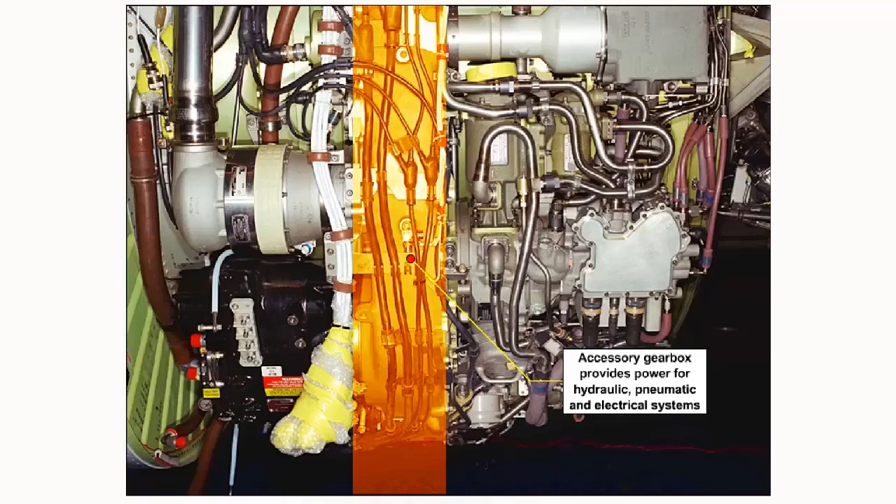The accessory gearbox provides the power for hydraulic, pneumatic, and electrical systems which are used on both the engine and in the aircraft. The accessory gearbox is also used to drive fuel pumps, oil pumps, and tacho generators and various other devices necessary for efficient engine operation.

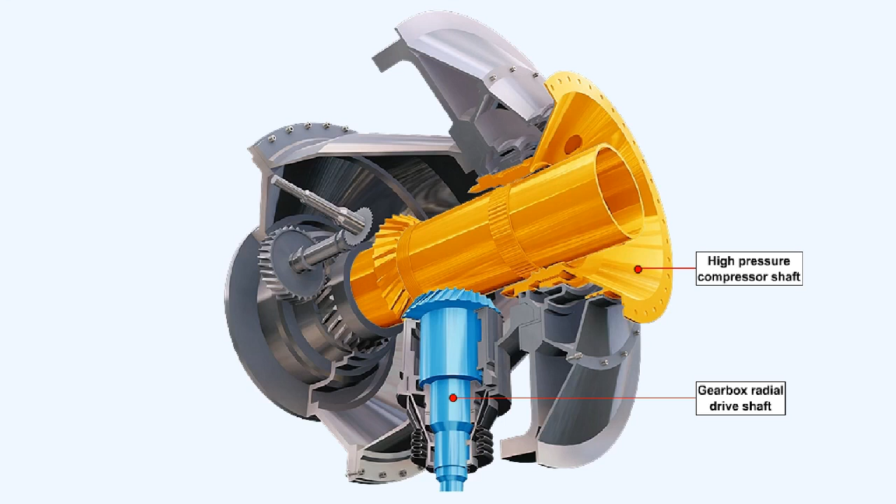The drive for the accessory gearbox is usually taken from the high-pressure compressor shaft via an internal gearbox. The drive then passes to an external gearbox, which provides mountings for the accessories and also, in the majority of cases, the engine starter motor.

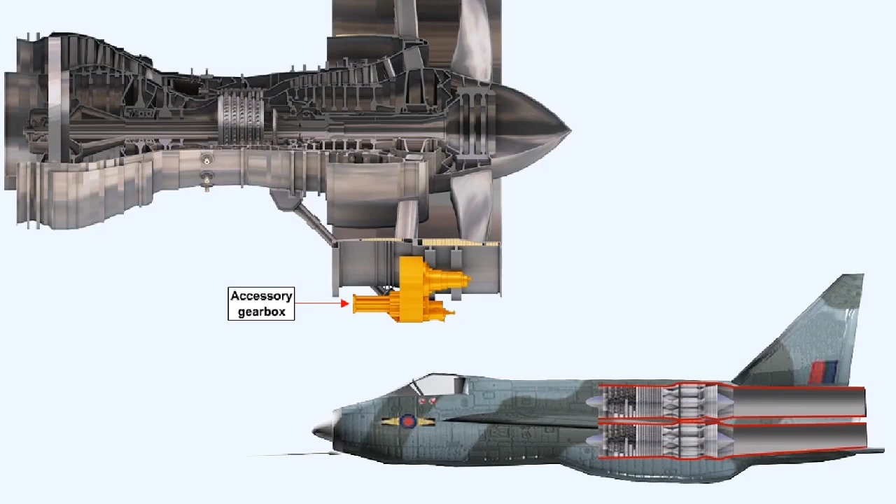In a modern turbofan engine, there is much less of a problem regarding where to fit the accessory gearbox than there would be in the case of the sleek, slimline type of engine which might be fitted in a fighter aircraft. The turbofan engine itself is so massive that even the largest accessories can be fitted beneath the cowling that forms the air intake fairing.

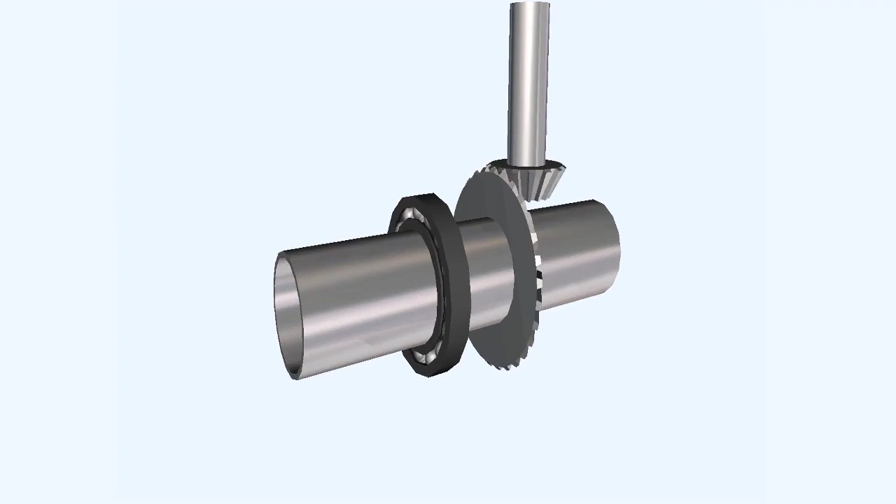Axial movement of the compressor shaft would cause the teeth of the bevel gears to move apart and the drive would be interrupted. Momentary interruption of a drive transferring 400 to 500 horsepower would impart massive damage to the teeth of the bevel gears and probably destroy them. This state of affairs obviously cannot be allowed to exist.

However, axial movement of the compressor shaft must occur due to expansion and contraction during the working cycle. Some method of arranging the gears so that they do not disconnect themselves because of axial movement of the shaft has to be found before a reliable drive unit can be manufactured.

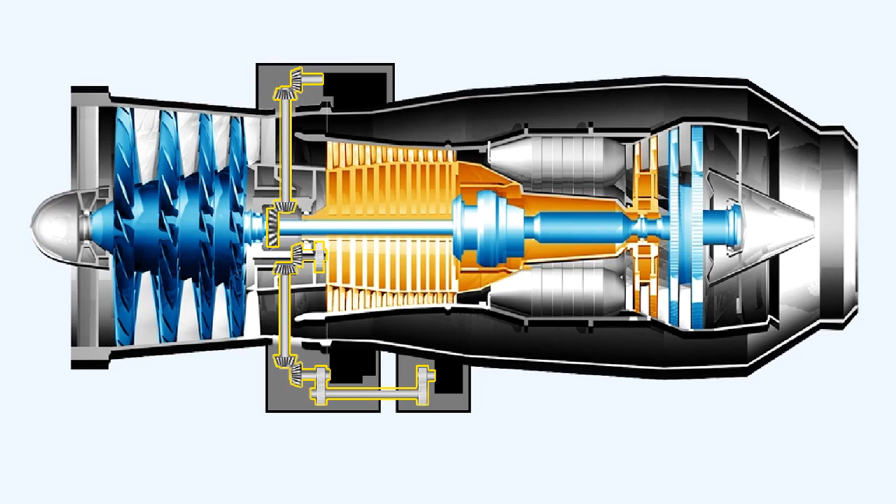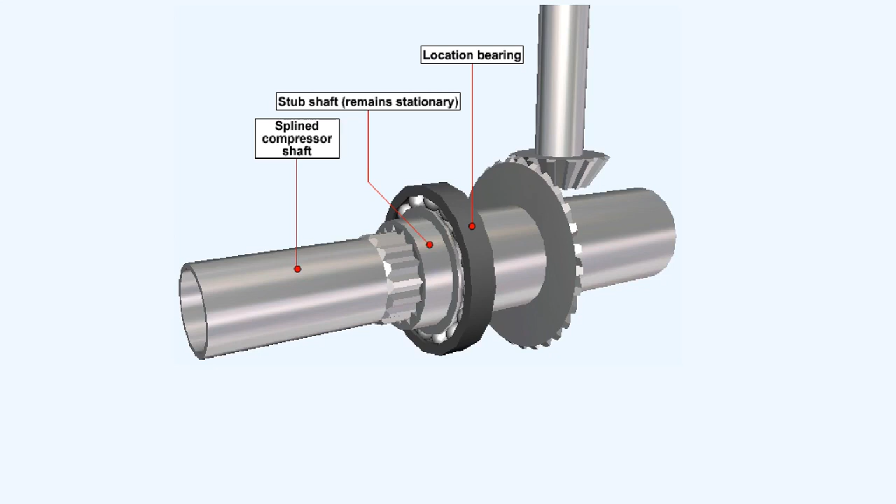This diagram shows one of the methods currently in use to pass the drive between two shafts on modern engines. If the compressor shaft is splined, then a stub shaft, which has teeth cut internally that conform to the pattern of the grooves in the compressor shaft, can be fitted around the compressor shaft. The fact that the spline shaft can move axially while the stub shaft is held firmly in the correct position by the location bearing means that the gear teeth will not lose contact with each other.

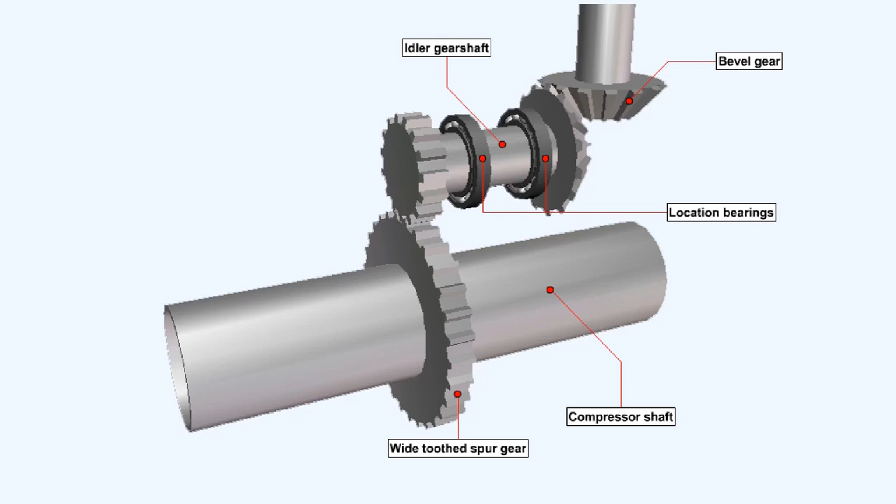An alternative system to the stub shaft drive, which will allow the drive to pass between two shafts, uses an idler gear shaft, which is held firmly in position by location bearings. One end of the idler gear shaft terminates in a wide-toothed spur gear, which can accommodate axial movement of the compressor shaft and the spur gear carried on it, and the other end is fitted with a bevel gear, which meshes with the radial drive shaft.

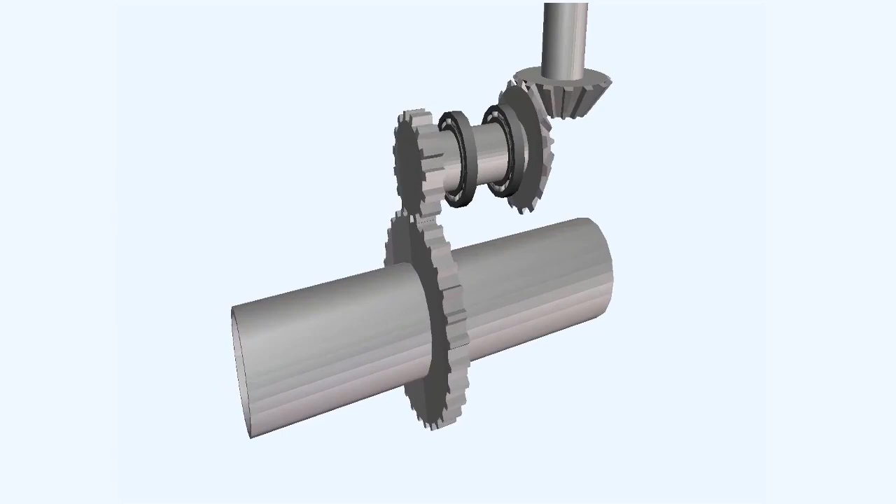In an effort to spread the load of driving accessories, some engines divide the accessory gearbox into two smaller separate gearboxes. As well as the drive from the high-pressure compressor shaft, a second radial shaft is taken from the low-pressure compressor shaft, which is rotating at a slower speed, and used to drive a second external gearbox. This two-gearbox system has a second advantage of allowing the accessories to be divided into two smaller groups, thus overcoming the difficulties of limited space around the engine.

During engine start, the starter motor, which is mounted on the accessory gearbox, normally driven by the high-pressure compressor shaft, has reversed the normal drive situation. Instead of the gearbox being driven by the engine, the gearbox is now the driving force on the engine. The starter motor thus causes the high-pressure compressor shaft to rotate, and the low-pressure compressor shaft is rotated subsequently by air being drawn through the engine.

This generates a situation that requires that accessories which are specific to the engine's operational needs, such as the oil pumps and the fuel pumps, are grouped on the gearbox which is driven by the high-pressure compressor shaft. This gearbox is classified as being the high-speed external gearbox, because it's being driven by the shaft which is rotating at the highest speed of all. Logically, the other accessory gearbox is called the low-speed external gearbox.

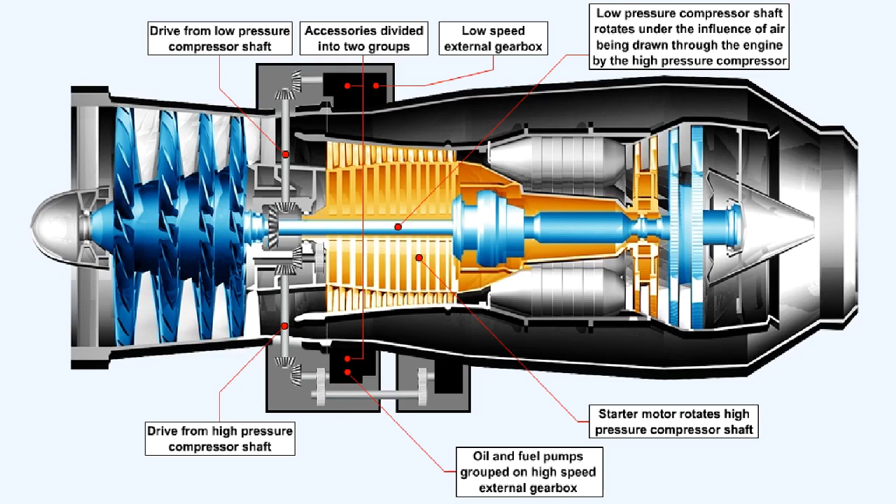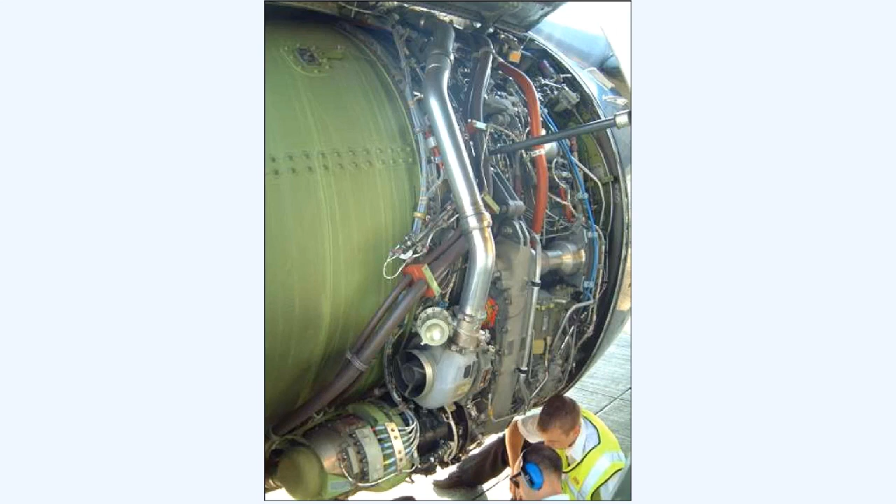Having to fit the gearbox around the engine means that the accessory gearbox must have a banana-like shape. For ease of access during servicing, the accessory gearbox is usually located on the underside of the engine. This picture shows an accessory gearbox and some of the associated accessories.

Worthy of interest are the oil pumps, which are contained in an oil pump pack, a unit which contains one pressure pump and a number of scavenge pumps. In some engines, as many as 6 scavenge pumps may be contained in an oil pump pack.

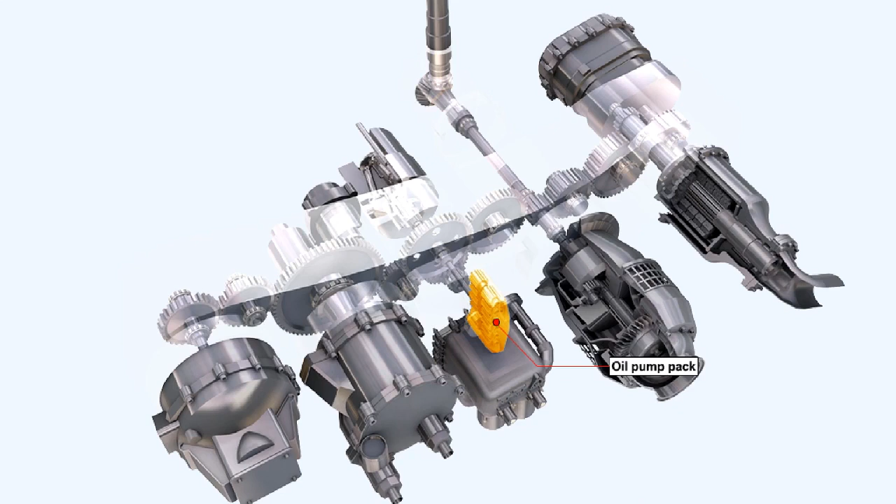The width of the gear teeth in this gearbox indicates that the greatest load from driving the accessories is taken on the right side of the gearbox, while the thinner teeth on the left side gear wheels show that their load is much smaller. This grouping of small and large gears enables an efficient distribution of the drives for the minimum weight.

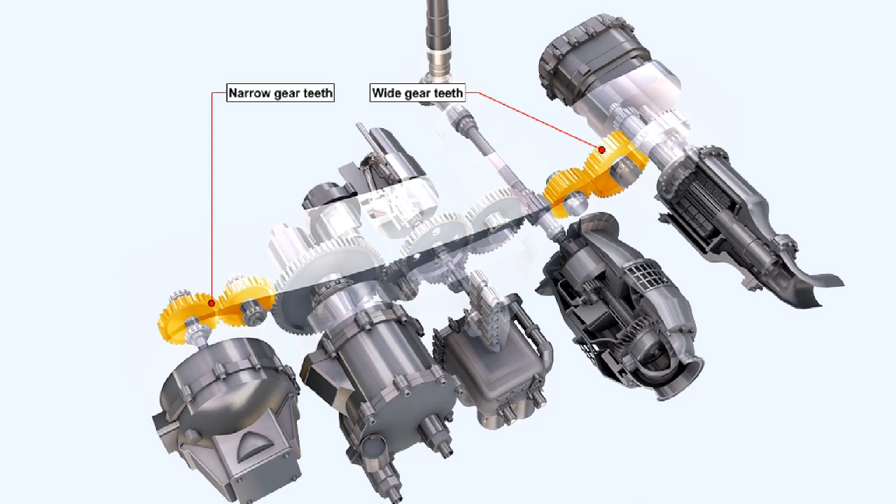Mechanical failure of an accessory could possibly cause the failure of the whole gearbox, and because the engine fuel and oil pumps are driven by that gearbox, the associated engine will fail.

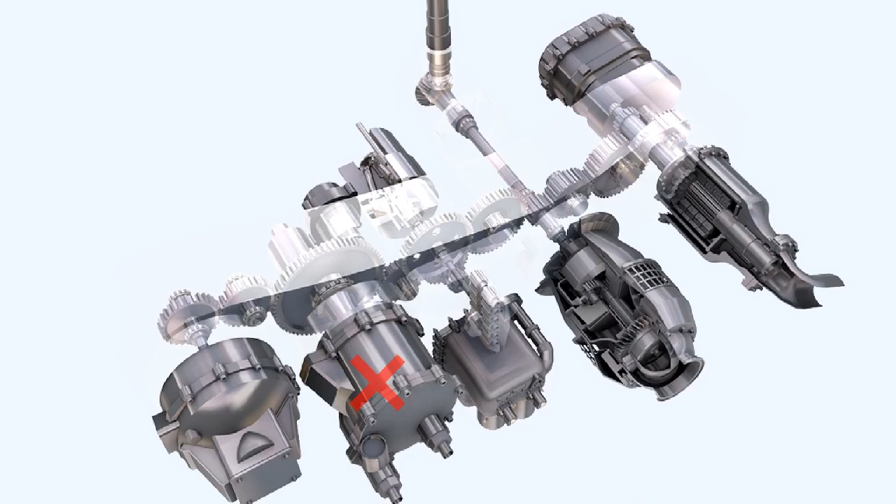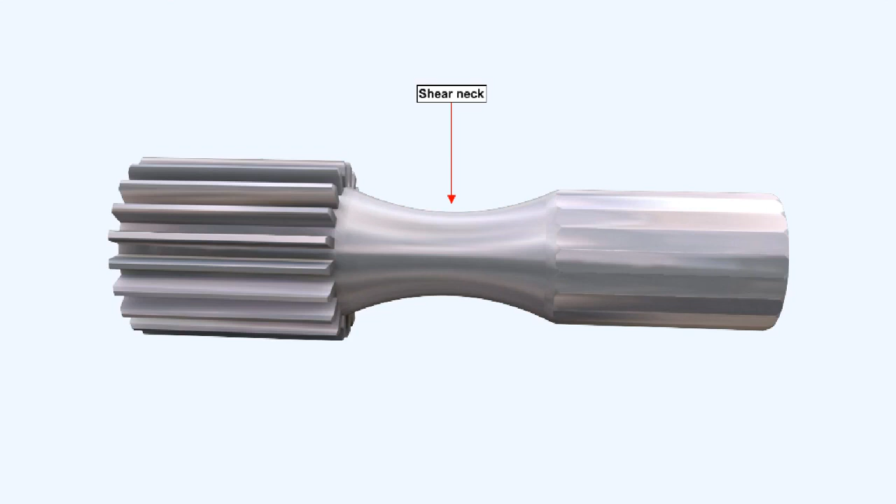To prevent this happening, the mechanical equivalent of an electrical fuse is fitted to some of the accessory gearbox drives. A weak section is machined into the driveshaft. This weak section is known as a shear neck. The shear neck is designed to fail if it incurs a load which is perhaps 25% in excess of the normal maximum load for the particular component being driven by that shaft.

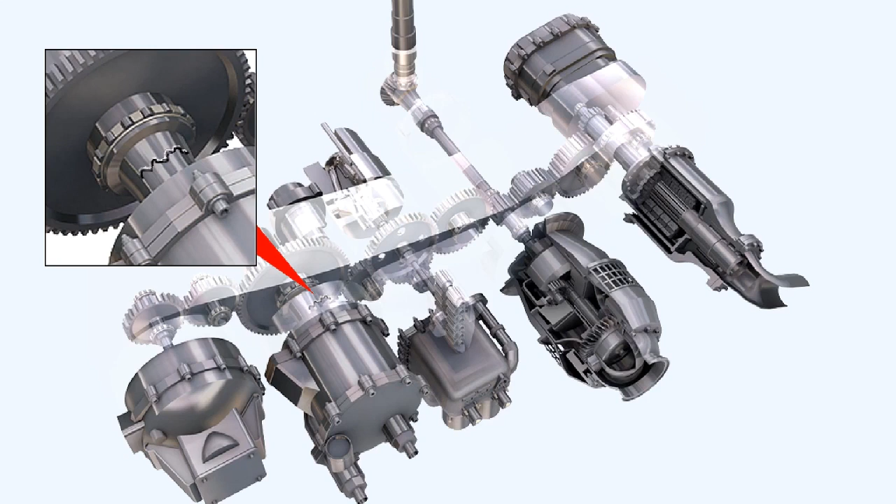In circumstances of excessive overload, the shear neck will break, allowing failure of the individual component, while the rest of the gearbox and accessories continue as normal. This feature is not utilized in the drives of primary engine accessory units, such as the oil pump pack or the engine high-pressure fuel pumps, because any failure of these components would necessitate the immediate shutdown of the engine.

This concludes the lesson on gearboxes.